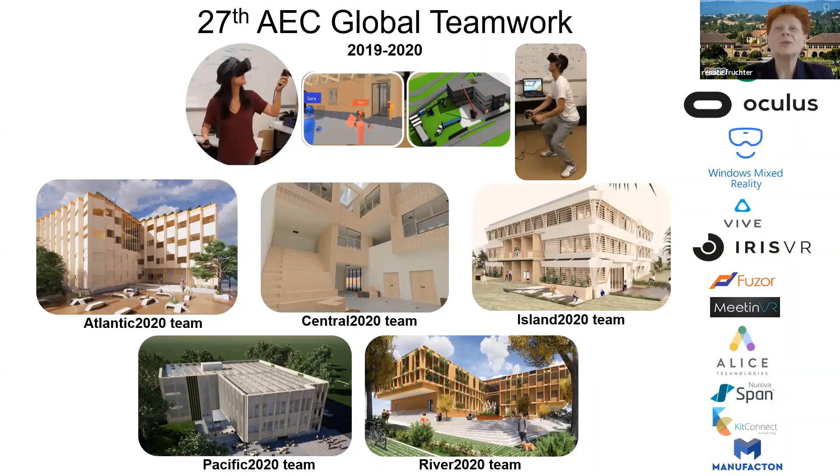We are the Atlantic Team 2020. First, please allow me to introduce our team. We have Maria, our MEP engineer from Copenhagen, Brandon, our structural engineer from Stanford, Ibrahim, myself, one of the construction managers from Madison, Wisconsin, Shuang, the other construction manager from Beijing, and Isabella, our architect, and Lewis, the other structural engineer, both from Brisbane. And here, our beloved owners, Dr. Renate Fruchter, Luke, Adam, Elena, and Andre.

When the team returned to our home countries and began to work on our concepts, we quickly learned the challenges we would be facing in the project. As a global team, we were dealing with 5 different time zones, all while trying to stay connected with each other 24/7. Although a challenge, we were able to identify it as an opportunity as well. Although shared workable hours were limited, they presented us with the opportunity to effectively complete 3 days of work across a 24 hour period. Initially, these time discrepancies made communicating and organizing difficult, but we quickly adapted using effective technology to allow Atlantic team to progress throughout our conceptual design phase.

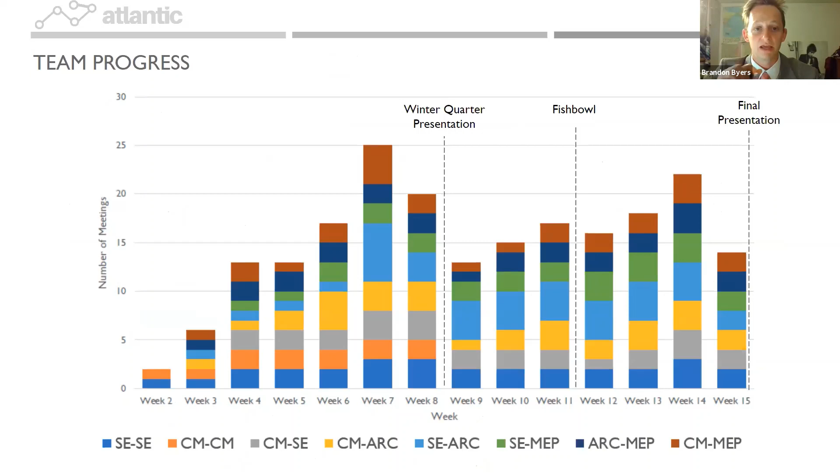Our team's goals stem from who we are as a team and what we want to achieve in the project and what we believe we can achieve for the community through architecture, engineering, and construction. These can be categorized into 3 overarching categories: sustainability, collaboration, and technology, and relate directly to the outcomes we can achieve in this project. We believe in resilience, fostered through community inclusion, compliance with LEED standards, adaptability, and smart design.

We aim for a design and construction outcome that is prefabricated and disassemblable. And working towards these goals, we aim to collaborate, be integrated, and connected to both the occupant and the building.

Our project is located at the fringe of the campus of the University of Wisconsin in Madison, located in the Midwest of the United States. Context is the first factor that starts shaping the identity of our building. The Muir Woods as vegetation, the Memorial Library and Union Square as influencing buildings, and the pedestrian circulation in Lake Mendota were selected as main shaping factors.

Madison has a continental climate with warm and humid summers and dry and cold winters. There are cold temperatures during approximately 9 months of the year. Hence comes the need to create a very well-insulated building, but don't forget about the cooling regarding the hot days in summer. Also, the relative humidity on site is slightly high, and it's a factor to consider in the design.

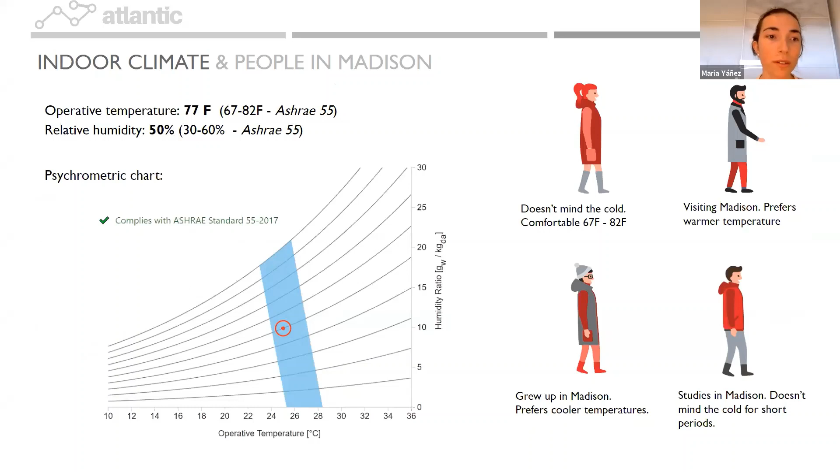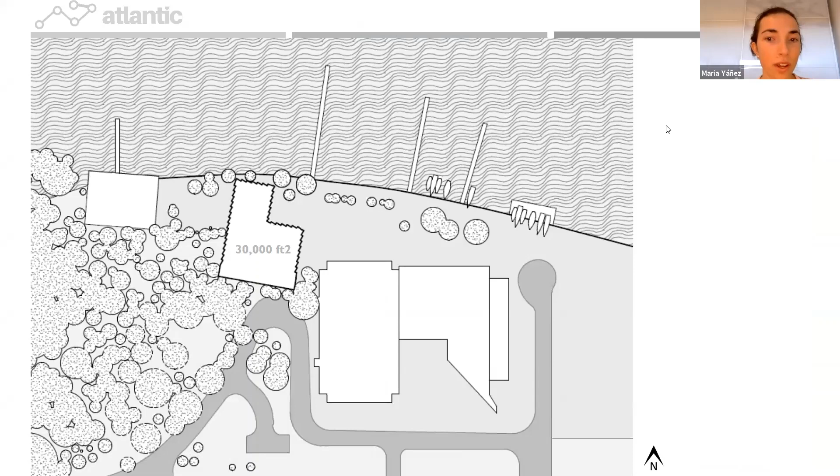The building orientation was selected in order to take the maximum advantage of the local sun, climate, and geography. Our site occupies the intersection between the campus life and the spectacular geographical beauty of Wisconsin and Lake Mendota. While presenting opportunities for its views to the lake and Muir Hill, our site is constrained by its lakefront location, single site entry, as well as a single tight and limited access.

An important aspect of the building orientation is to determine how the sun positioning affects the building design. Our building orientation and architectural design intends to make the most of the outdoor and interior layout while advancing in our key goals. The analysis has been possible thanks to a parametric sun path study through Grasshopper software.

Throughout the program, we developed two driving concepts, both of which underwent much iteration and evolution. The first was forum, and the second was weaving. Both concepts evolved from a singularity to an integrated driving processual idea that generated a spatial quality for the building.

For our concept selection, we wanted to emphasize that the best option should not be chosen simply based on a number. We wanted to evaluate the intangible and tangible aspects of both building concepts. The tangible criteria of our decision matrix integrated our team goals and project challenges. They bring together everything that we're looking for. The intangible criteria are not as readily quantifiable, but are equally as important.

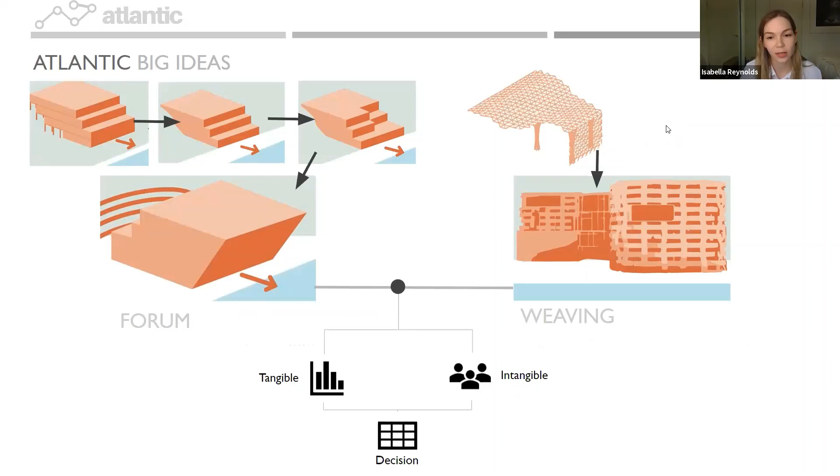After completing the decision matrix, we actually had a tie between forum and weaving. Ultimately, we decided as a team to add one more criterion, challenge. Which concept would challenge us to further encapsulate our team goals? That is to say, which would push us to integrate, to learn, collaborate, and be innovative in our solution. Because of this, we decided to bring forward the weaving concept into the spring quarter.

Weaving is both our team's process and the conceptual driver. It's a singular concept and yet implies the process of combining and integrating. We draw on the local historical practice of weaving, which extends from the basket weaving practice of traditional owners to textile production as a part of the arts and crafts movement. Weaving as a process unifies the threads of sustainability, prefabrication, and discipline knowledge into a building for the future.

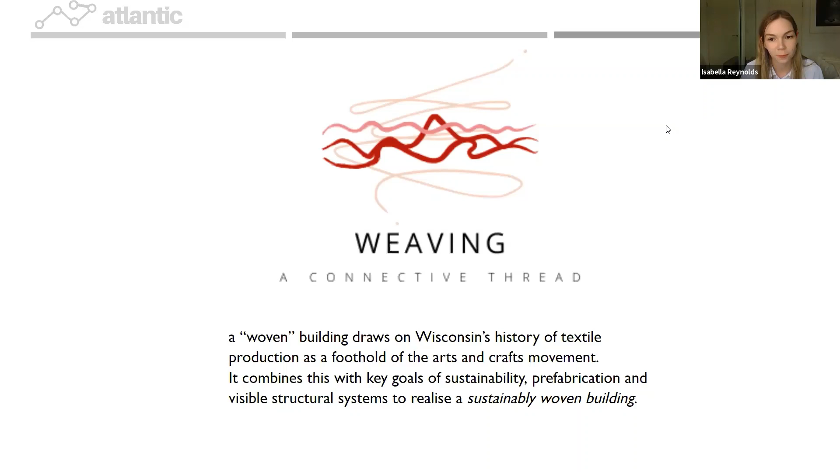As a team, we decided the weaving concept was best conveyed through the facade. Our team's goals and values were reflected in the facade and its iterations, and all disciplines worked together to devise a solution which met these goals and tackled the three challenges. We aimed to produce a facade which was easily assembled and disassembled, contributes to the building structurally, and enhances the building's energy performance.

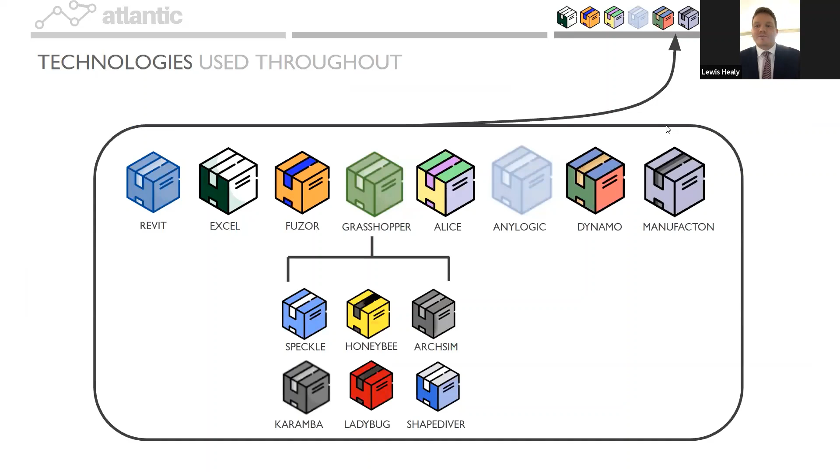Throughout the presentation, we'll be using icons to represent the different software and technology which was used. These also include several plugins for Grasshopper, which assisted in various design and analysis tasks, including Honeybee and Ladybug for solar and daylight, Archsim for energy, Karamba for structural analysis, and Speckle, an open source cloud-based platform for interoperability. These icons will be displayed in the upper right corner of your screen on slides to indicate which software was used.

Grasshopper, a parametric design tool, was used to iterate the facade geometry. This allowed us as a team to rapidly explore the implications of changes of key parameters on the building, and therefore make smarter and more informed decisions at earlier stages of the design process. The chosen control parameters allowed us to generate facade solutions which integrated all of our goals. Revit models were produced using Grasshopper, allowing detailed models to be produced at early stages of the design. This allowed us to present designs to our owners frequently and bring them along the design journey with us.

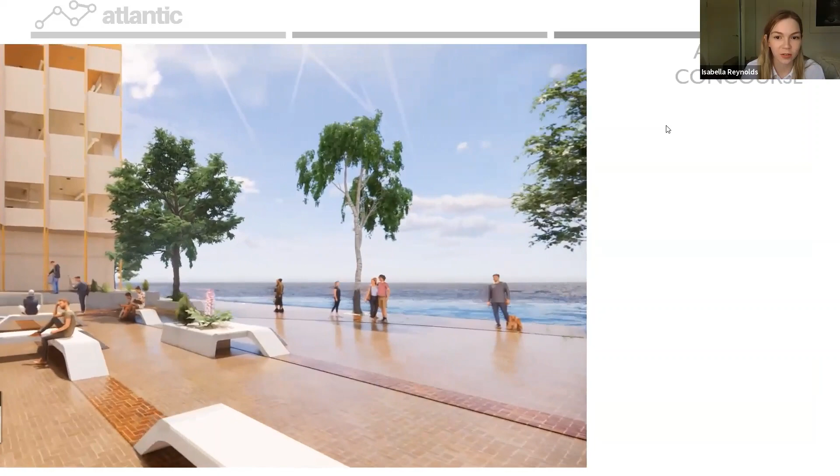The building product synthesizes the challenges of the previous iterations into an offering that interacts with its spectacular geography and creates a space for learning, for teaching, and making for a new generation of engineering professionals. The Lakeside Plaza provides a gathering space and extends into the ground floor lobby, into which the stair, the connective thread of the building, descends. The stair forms the heartbeat of the building, connecting people and physical space. Visual transparency through the building aims to encourage an atmosphere of inclusivity, relaxedness, and openness within the building.

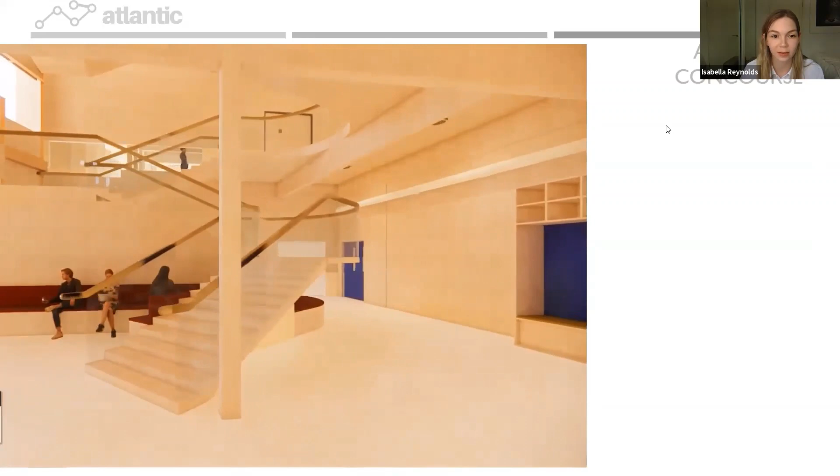The building's architectural expression is evocative of weaving through pattern, texture, and the interplay of light and shadow. It combines innovation with sympathy to its context by mirroring the setback distances of its neighbours and the civic contribution to public lakeside space. It also extends the cutting-edge contemporary architectural language that's evolving within the campus.

The ground floor includes learning spaces such as instructional laboratories, an auditorium, and building amenities, which are centered around a generous public-facing lobby. The mechanical room is placed in the ground floor, and a vertical shaft with the building systems is extended through all floors. By centering the mechanical room within the building, the axis bisects the building, thereby allowing adequate ventilation throughout while minimizing heating and cooling on one side.

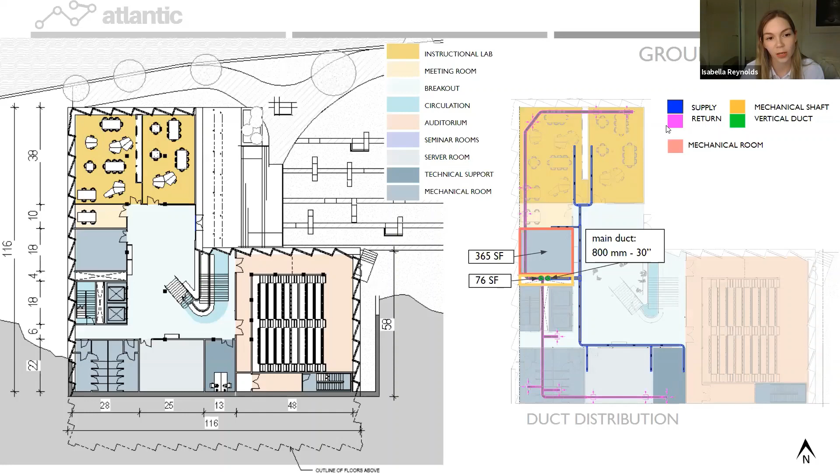Our grid system is a pattern that is concentric to the facade because our floor panels actually sit within the facade system. Our facade will provide uniform support to the CLT slabs along the building's perimeter. The beams in our grid were designed to not frame into the facade due to structural and constructability difficulties. Furthermore, disassembly of the facade would compromise the integrity of the building if the beams were framing into it.

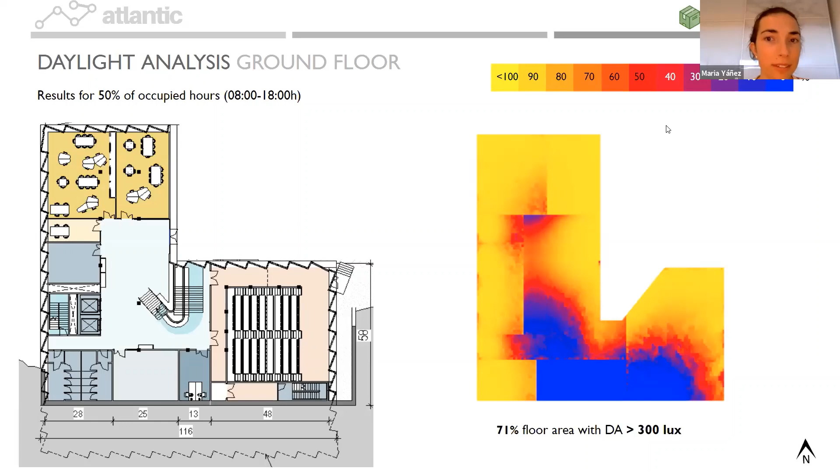A main goal and challenge for the architect and the mechanical engineer was to create an interior design that responded to daylight and energy efficiency. For this, a daylight and energy analysis have been carried out for each floor with Grasshopper. The south windows get good sunlight and allow for extra heating in the cooler months, lowering the heating demand. And the east and the west windows are offset from the sunset and sunrise, which lessens the design cooling load.

Within a workspace on the ground floor, we see how the pattern created through opacity and transparency at the facade translates to a dynamic, warm learning space, fostering a thriving community founded in student engagement and comfort. At the mezzanine level, learning spaces are centered around the connective stair, which connects levels physically and visually. The auditorium on the eastern side of the building is in close proximity to seminar rooms and spaces for learning and gathering.

The sun provides superior natural light for the occupied rooms located in the back, in the first and the second floor. For the ground and mezzanine floors, the spaces that don't require daylight have been allocated in the back, as we have a hill that blocks the daylight.

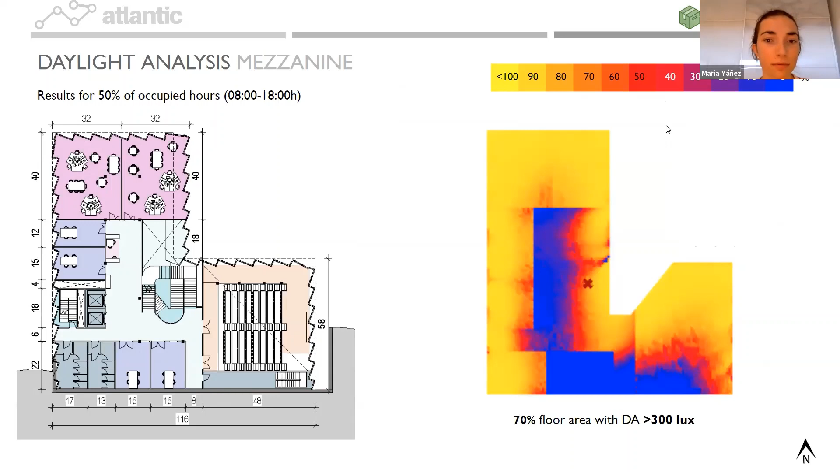The auditorium offers a warm and flexible learning and presentation space with express structure and internal registration of the building form. The retractable seating design allows the space to be used in a multitude of ways and adapts to its owners and its occupants, ensuring resilience as time and needs evolve.

An integrated mechanized track shading system provides complete flexibility, with windows able to be covered by flush timber panels for presentation mode or retracted to provide natural lighting and views to the lake.

At the first floor, faculty offices are gathered around a central open workspace, which allows staff and their students to meet and collaborate informally, the planning fostering connection between building users through functional, delightful spaces.

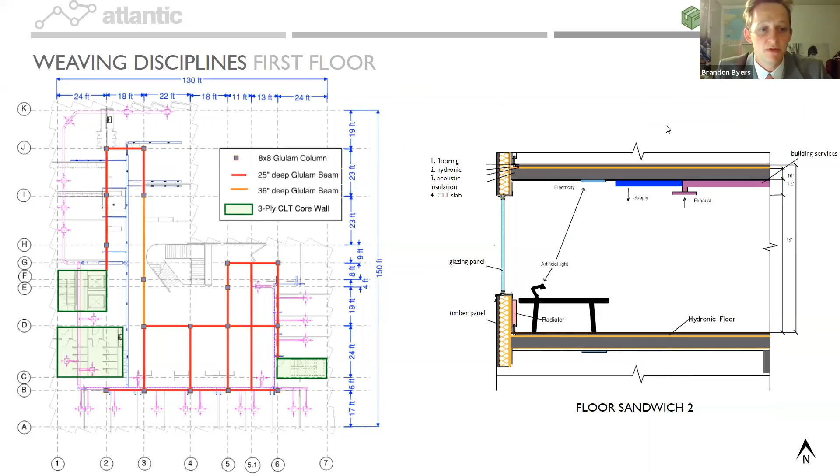You can see that our structure begins to extend on the south side of the building. We use deep beams on the first floor to remove columns near the entrance and open up floor space. You can also see here how the MEP aligns with the grid, weaving within the structure.

The faculty lounge, classrooms, and offices have been allocated in the south, north, and east facade, providing the natural light entry. For the offices and other internal workspaces, the furnishings parallel to the windows have a maximum height of 42 inches to allow the daylight entry.

The faculty lounge, located on the second floor, offers spectacular views to the lake for all staff, rather than visual amenity being restricted to the few. The shape and size of the glazing not only capitalizes on views, but enhances natural lighting and user comfort. A place for gathering, interaction, and reprieve, with integration of contemporary artwork, it makes this place a celebration for its staff.

The weaving concept's extension into planning is exemplified as opportunities for spontaneous interaction and collaboration are maximized, as work pods or nooks within the breakout space weave learning spaces into the public area.

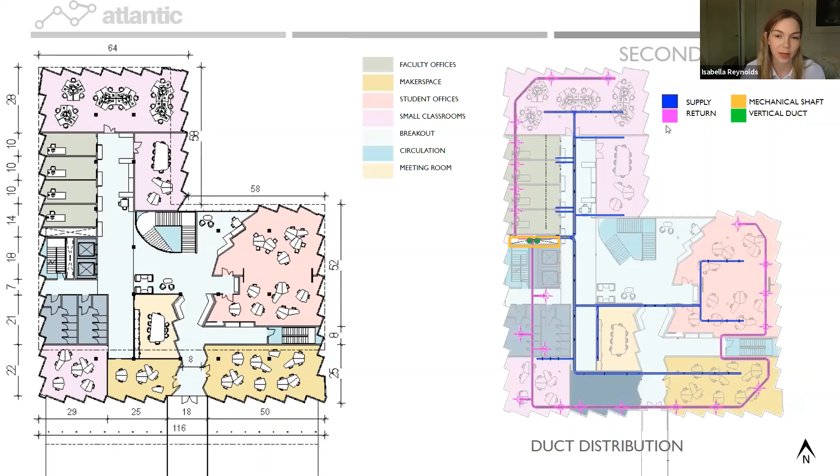Because of our exposed timber system, the mechanical systems were placed beneath the structure to allow for easy integration. With the ventilation system selected, we were able to reduce the equivalent floor-to-floor height, thus improving the user comfort.

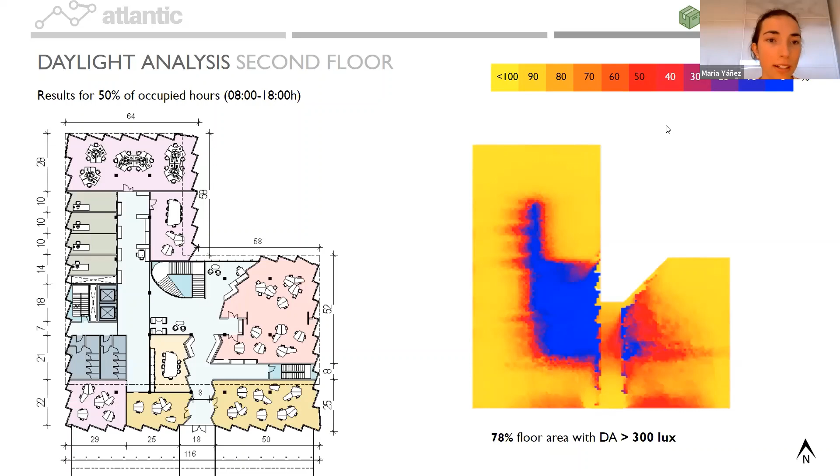For the top floors, shading should be used in the south facade to avoid overheating and user discomfort, so it seemed crucial to use the same software to do a glare and shading study. This one has allowed us to find a shading design that optimizes daylight and ensures glare comfort. Also, by studying the daylight coming into the space, the glazing use of the building has been optimized, and this is reflected in the facade cost, energy performance, and daylight conditions.

The second building entrance at the south carves an activated concourse through the building interior, and it provides views through to the lake at the north upon entering the building from the campus side. The folded exterior expression is continued inside to create an inviting and dramatic procession into the building.

The use of timber within the interior design fosters a connection between the material experience of the building and its construction elements, framed against glimpses of Lake Mendota. Floor and joinery finishes were selected to create a neutral background to the vibrancy of campus life, and light tones reflect light to create comfortable, enjoyable spaces for reading, work, and collaboration.

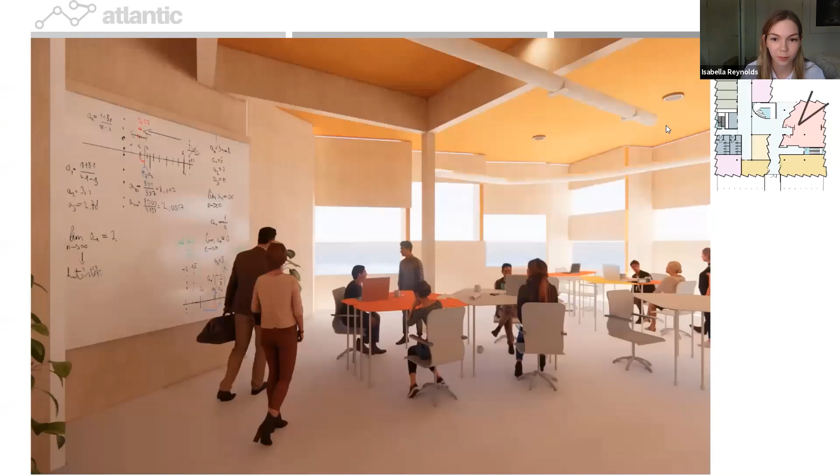Learning spaces also embody the dynamism of the learning experience with warm, neutral materials contrasted with vibrant colour. Building structure and MEP solutions are woven into the daily experience of the student and facilitate an environment where the building itself teaches the students about construction and about design.

Smart control units and sensors aid in the monitoring of the building. Sensors can be found in the lights and HVAC systems, improving the building energy performance. We aim to create a building so smart and intuitive that it knows exactly how much energy is consumed and adapts itself based on the weather, season, and work patterns.

In a meeting room, the weaving concept is extended into the architectural details. A frit pattern applied to the glazing not only provides privacy, but references the building's contextual history through the abstraction of the weaving pattern.

Cutting through the building shows the visual transparency between levels and their spatial connectivity via the stair. We can also see it between forest and lake and the maximization of these two visual resources.

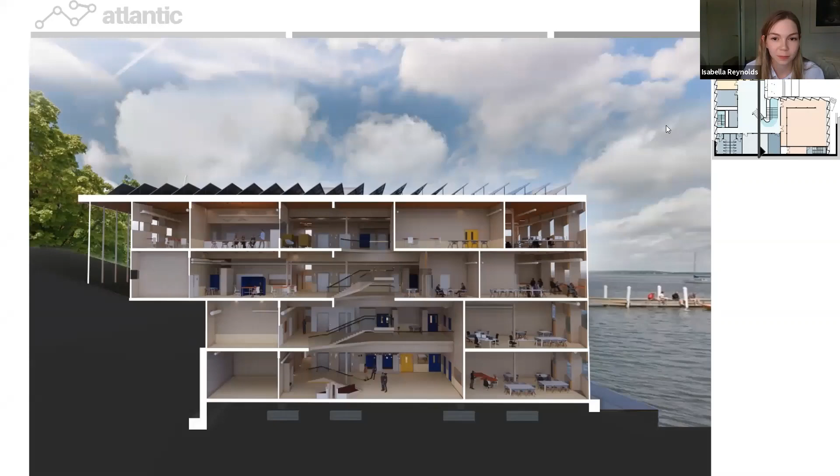The building expresses the notion of weaving through light, shadow, and texture, integrating user needs with disciplined solutions to create a dynamic, iconic building for a new generation of engineers, educators, and administrators of the University of Wisconsin-Madison.

When we began to conceptualize our building, we started by thinking about how our solution could be a reflection of our team's goals and values. All of the constraints listed on the screen contributed to the realization that a prefabricated engineered timber building was the most suitable building solution. This would help reduce on-site activities and construction time, minimize the building's carbon footprint, and aid easy assembly and disassembly.

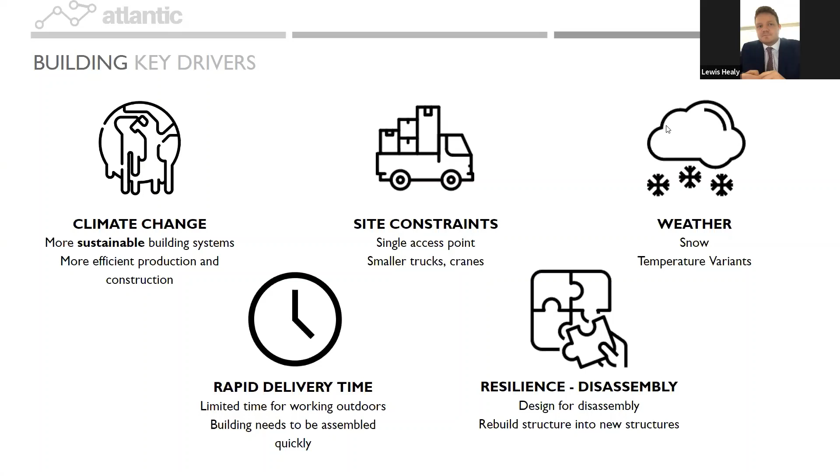The woven pattern was achieved using 3 different module types. 2 different sized timber modules give the facade its noticeable texture. At the same time, the facade was parameterized to make sure it was not too visually complex, and the number of assemblies of modules was at a minimum. Assemblies also consist of glazing panels, which provide the building with adequate daylight. The facade consists of solid timber modules in vertical channels, which provide support to the floors and contribute to the woven pattern.

Timber modules consist of 3 4-inch by 4-inch timber studs wedged between 2 3/4-inch plywood sheets. Structural timber modules are 3 feet long and non-structural modules are 8 feet long. All modules are 2.8 feet high, which allows for 5 modules to be stacked within the floor-to-floor slab height.

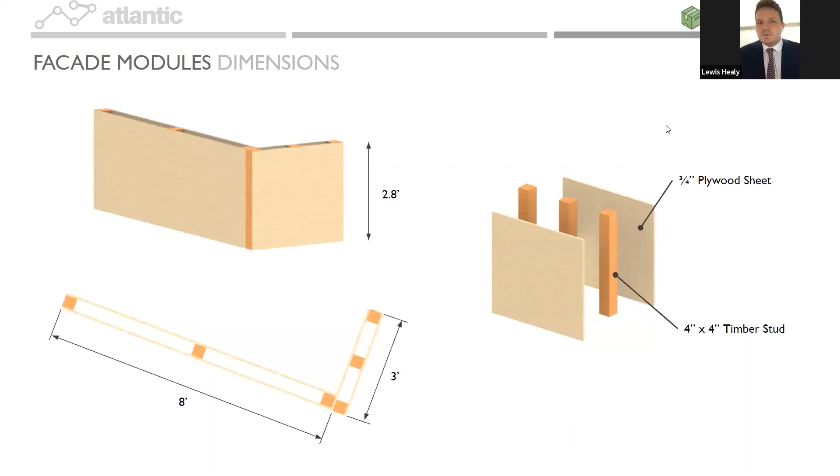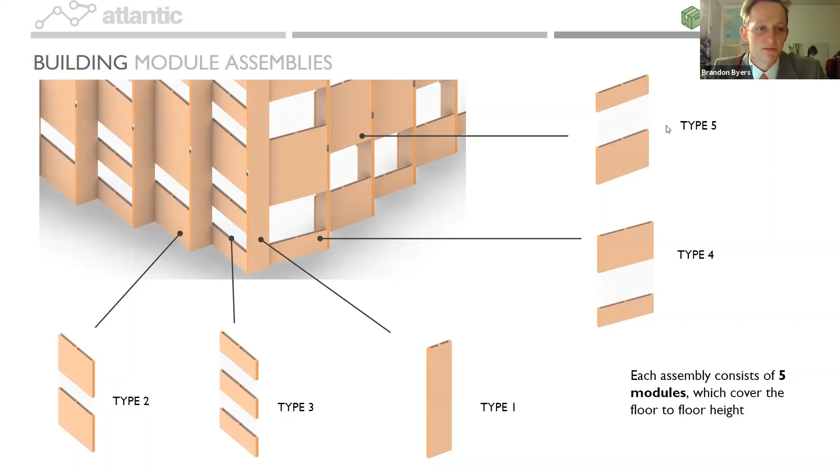The facade will be constructed floor by floor, with modules built into 5 different assembly types. Each floor is 5 modules high, and we need the top and bottom modules to be timber to allow for ease of construction. This meant that the glazing was placed in the middle of the assemblies, affecting the aesthetics of the weaving pattern. But we were able to minimize the number of assembly types by iterating with parametric design.

The Urban Land Institute defines resilience as the ability to prepare and plan for, absorb, recover from, and more successfully adapt to adverse events. The vision for Team Atlantic's design was to allow the building owners to prepare for and adapt to future adverse events. We believe that this can be done by creating a building that adapts as quickly as its occupants.

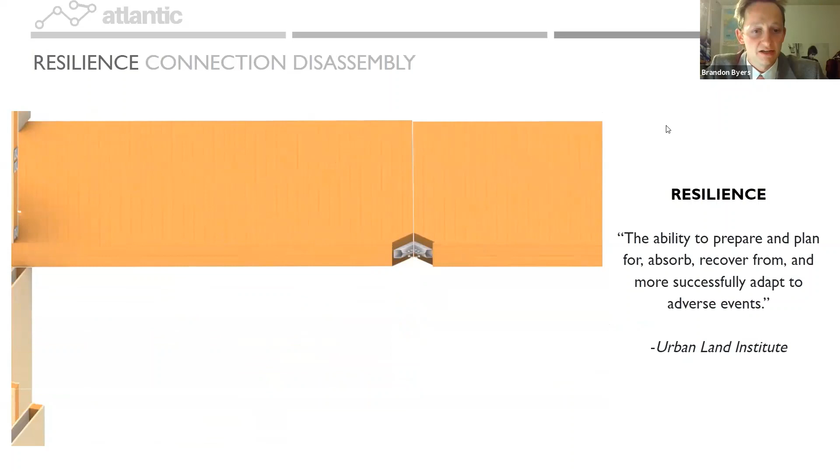If you've ever put together a piece of IKEA furniture, this image may feel familiar to you. In the same way, the Atlantic building is explicitly designed as a kit of parts, which can be disassembled and reassembled. Facade panels, CLT floor panels, beams, and connections can all be reassembled to adapt to the changing requirements of its users and its context. The only way to ensure genuine resilience in a world of constant change is to be truly adaptable.

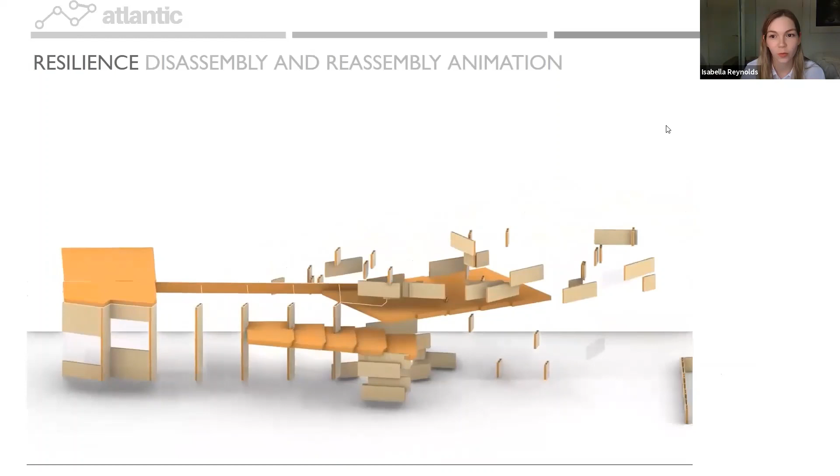Here we can see one of the many potentials for what the building could become should it require a second life. While panel sizes are designed for the uniformity and breadth of building application, the Atlantic building would be perfectly suited to the creation of social housing. This potential use contributes to the resilience not only of this single building, but of the community as a whole.

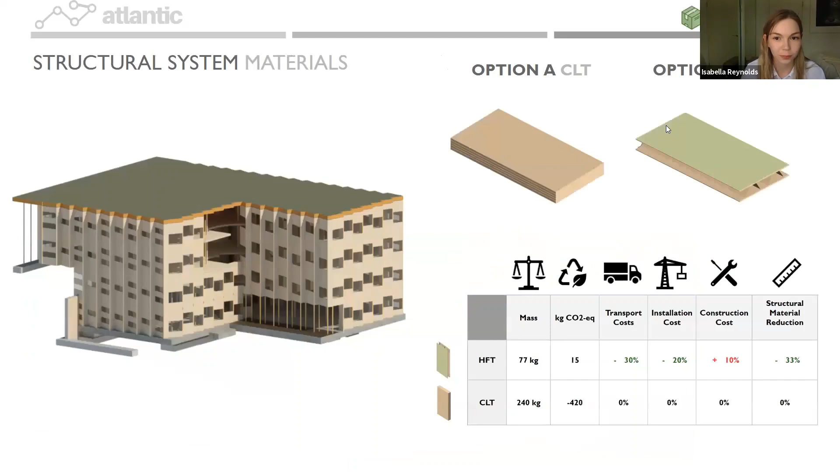Initially, Brandon and I investigated the use of HFT panels as an alternative to CLT floors and walls within the building. HFT is a panelised system using low quality and cheap plywood and veneers reinforced by GFRP. It has equivalent strength characteristics to CLT, but with 66% less mass. After the winter quarter, we decided to use HFT. However, we since realised this would not be feasible to integrate with our facade.

Vertical loads are carried by beams and columns into reinforced concrete pad footings. A shallow foundation system was required due to the high water table at the site, and so 3 feet deep footings founded at 3 feet below ground level were chosen. The base of the facade will connect into an RC strip footing, which protrudes 3 feet above ground. This raises the building above the predicted flood height.

The southern face of the building is supported by a reinforced concrete strip footing on the hill. The region beneath the step onto the hill will be backfilled with soil, which will be resisted by a steel soldier pile retaining wall. The perimeter columns also contribute to the lateral resistance.

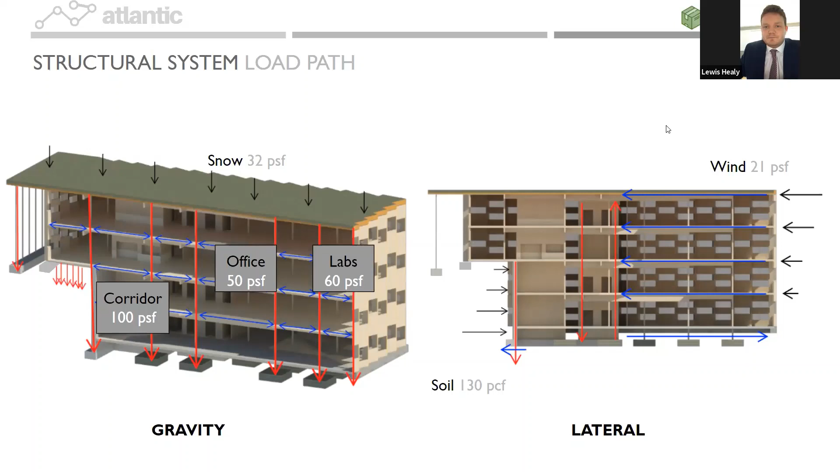A workflow was devised which integrated the structural design and modelling into a single process. The grids were set up manually alongside Isabella within the architecture model, coordinating column placements with the interiors. These grids would be sent from Revit using Speckle and brought into Grasshopper. The Grasshopper script would generate the analysis model from the grids using Karamba, and Rhino Inside was used to create the Revit model using the required member sizes from the analysis.

Keeping the analysis within Grasshopper, we were able to allow the design to be completed alongside the Revit model. Member sizes could be given to other disciplines quickly, especially when space proving with the architect. We could then reduce time spent doing clash detections and re-exporting models. The outputs of this workflow were also thoroughly checked by hand.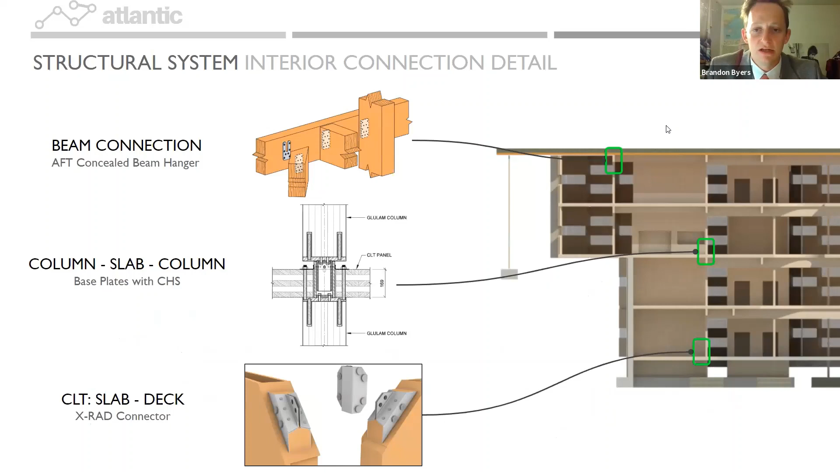Our connection details were designed to allow for ease of initial construction and future disassembly. These timber connections are all hidden to the public eye, but are essential for the construction speed and efficiency. The connection hardware is structural and connects the structural and non-structural modules together. These modules have solid timber that allow for sturdy connection hardware and recessed connections. These connections also allow for easy design for disassembly and load transfer between vertically stacked modules. What is critical for these connections will be the tolerances, but this can be achieved with industrialized construction.

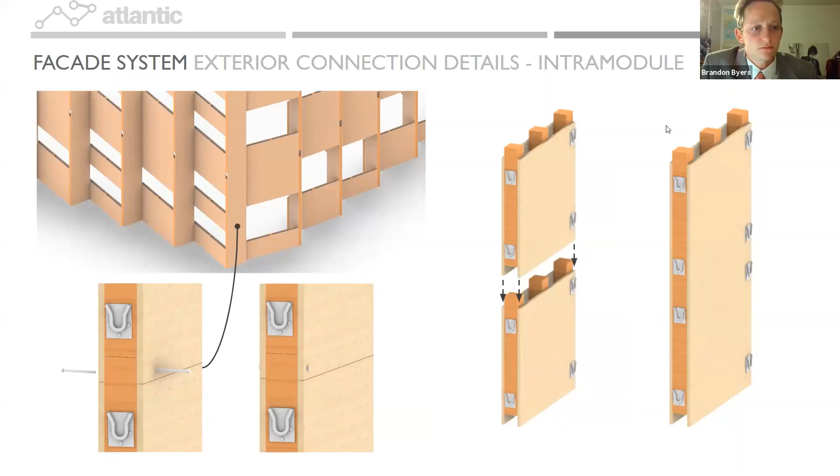Another important feature of the structural facade is the detail connecting to the slab. The connection will account for environmental factors by extending insulation below grade, incorporating a waterproof membrane and sill plate beneath the module, and raising the concrete strip footing above grade to also protect against flooding events. The connection between the timber modules and CLT slab is an adaptation of a standard CLT connection using dowels. The advantage of the dowel connection is the ability to conceal the connection. In addition, the dowel will be inserted into the center stud to not intersect with other hardware.

As we have mentioned, the gravity loads from the slab will be transferred between the internal grid and the facade modules. The narrower structural modules are the stiffer elements and will carry the loads. The non-structural modules will only carry their self-weight. The lateral loading from wind will be transferred into the dowel connections that are approximately 8.5 feet on center.

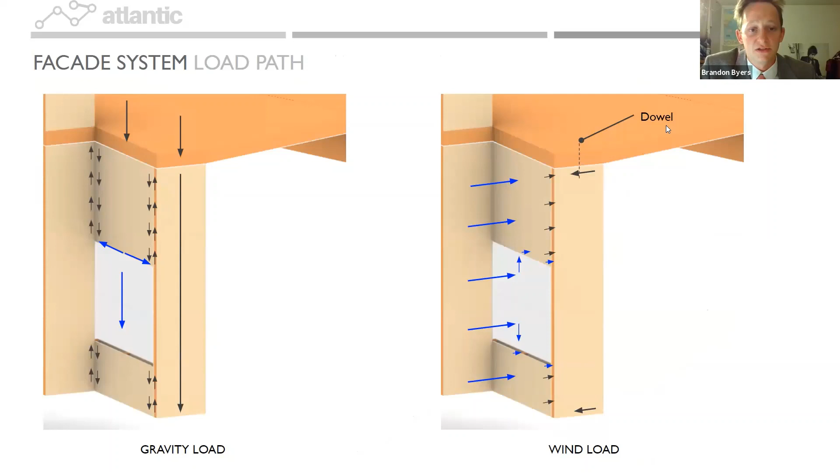One of our primary challenges with the facade was to deal with the effects of weather. The timber is on the inside of the complete built-up module. From there, we devised a system of moisture protection, insulation, and flashing that is enclosed within the timber cladding. The insulation and flashing overlaps from one module to the next to ensure protection from the elements in continuous timber cladding.

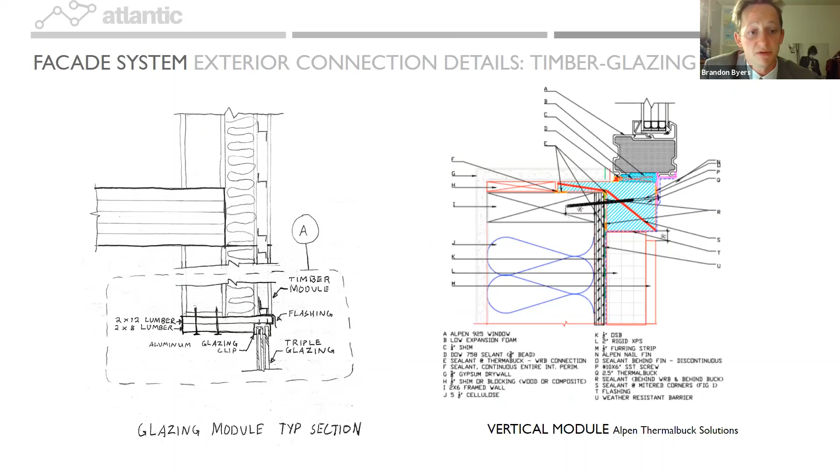Another challenge was designing the glazing modules. We first conceptualized the module connection as a team and then worked with Alpen Thermalbuck to design feasible module connections. The design allows for the timber and glazing modules to separate in disassembly. In addition, we designed the glazing connection on top of the module to allow for displacement, thus effectively acting as a pin connection.

To achieve a high level of energy efficiency, it is important to pay attention to the building envelope assembly. The window plays a very important role in this stage. Our window solution consists of a triple pane that integrates a thin glass into the insulated glass unit, and it is double insulating compared to conventional windows. The insulation of the facade has also been carefully considered, and it is important to create a tight envelope that minimizes energy consumption while being able to manage the heat gains on hot days.

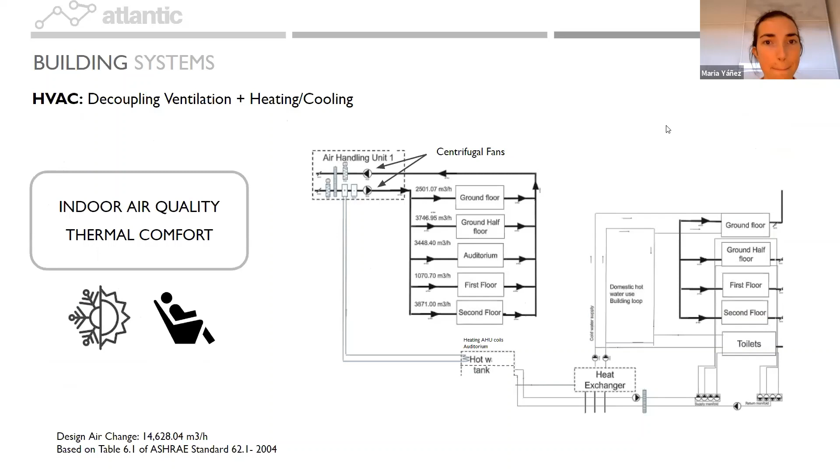For the HVAC, ventilation has been decoupled from the heating and cooling system. This allows downsizing the equipment, reducing costs, energy, and space needs. The indoor air quality is achieved through the fresh air, while thermal comfort is provided by the heating and cooling system. The ventilation is supplied by a dedicated outdoor air unit, which provides 100% outdoor air. Considering our site challenges, the system performance is further improved by using energy recovery, a dehumidifier, and filters, and this comes with improved energy efficiency and user productivity.

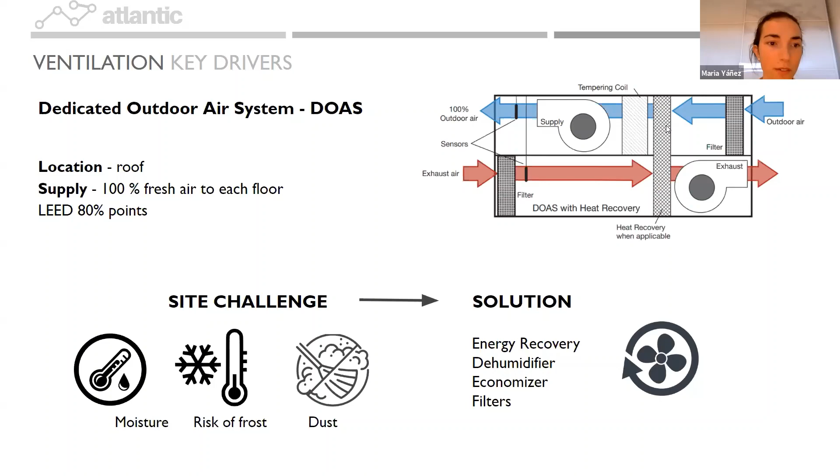The DOAS is capable of monitoring and directly controlling the outdoor airflow and ensures that it doesn't fall below the minimum required. Every space of the building has CO2 sensors to maintain CO2 levels within the respective spaces. With this solution, the indoor environmental quality is ensured.

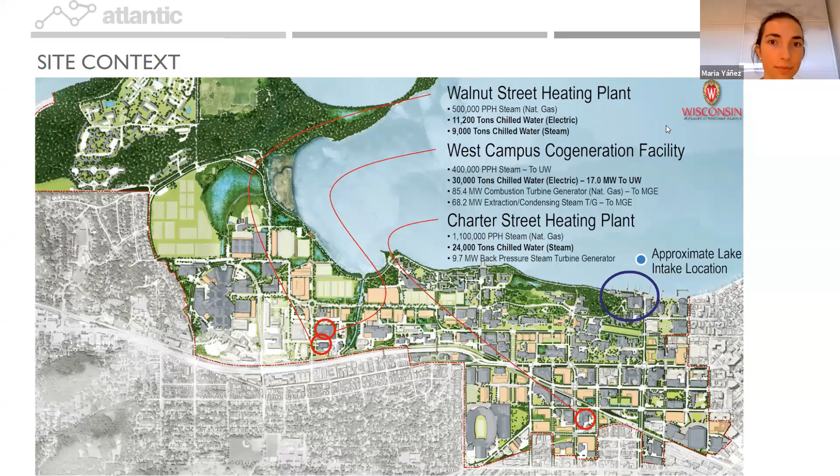So the first step to select the heating and cooling system is to gather the overall context on site. It is important to see what is available and what can benefit the solutions. Our site is surrounded by a lake, and a cogeneration facility supplies the energy source to other buildings on campus. Madison is well known for biofuel production, and around campus many biofuel farms can be found. But does it make sense to use this waste to provide heating for the building? Another solution to manage simultaneous heating and cooling loads was the use of a heat pump, but would it be more economical or efficient?

After detailed research, the West Campus Cogeneration Facility was chosen to provide the energy source. With this solution, another instance of native-to-place design is shown. It is a very economical and energy-efficient solution and follows the owner's requirements and project goals, and the facility also plans to be more sustainable in the future, reducing carbon emissions.

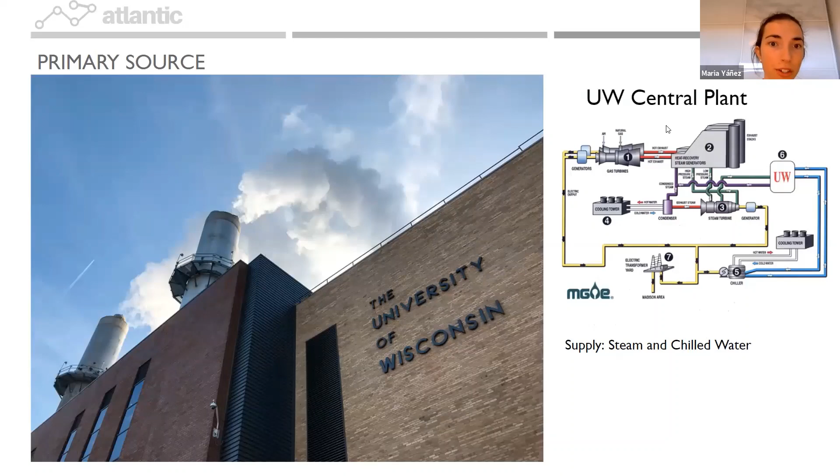The schematic intends to show the energy source management of the building. The cogeneration facility provides steam and chill water for the hydronic systems, and circulation pumps driving the district water are used to ensure the hot water is circulating at all times.

For the secondary system, underfloor heating and cooling is integrated in all floors of the building. Additionally, radiators have been placed in specific spots according to the loads and the possibility of interior design. The chosen strategy intends to satisfy not only the interior of the building, but the building body itself.

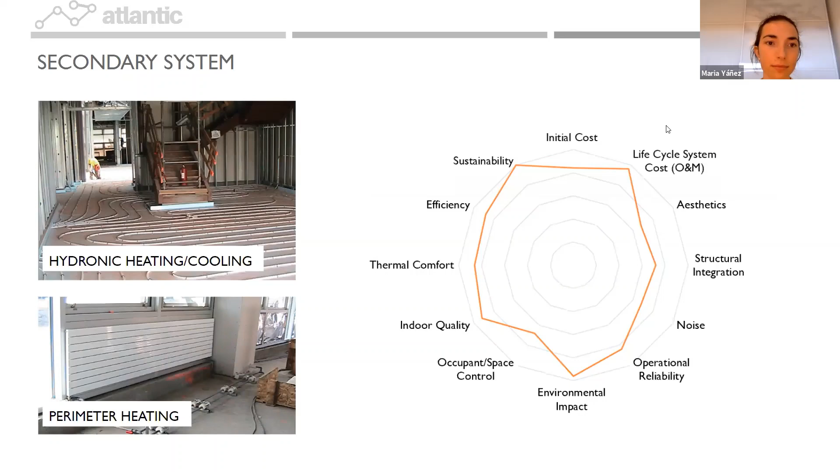According to our goals, to make an intelligent building connected to the user, a zoning system is integrated in every floor. This one learns from the user behavior, adjusting the settings in the long-term view to provide the best comfort.

A first step was to calculate the heating and cooling loads for each space. The Archsim plugin for Grasshopper was used to conduct the energy simulations. The floor plans were sent by Speckle from the architectural Revit model, and the script extracted the zones and ran the simulation.

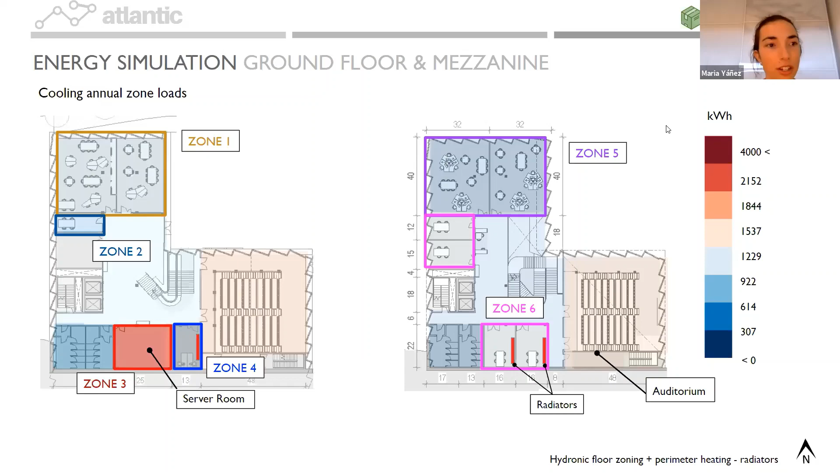To determine the thermal zones, thanks to a collaborative work with the architect, the areas have been grouped together with similar positioning and thermal conditions. The location of the spaces is based on the combination of the daylight and the energy results.

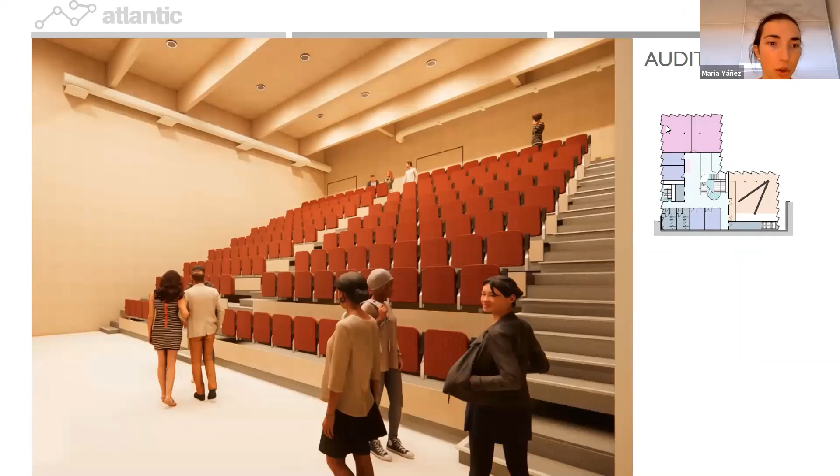The auditorium has been treated as a separate zone, as having high variability in occupancy. Here, the outdoor air is directly ducted to fan coil units. With this choice, the space receives appropriate ventilation levels, as well as being warmed up in a faster way than using hydronic floors. Demand control ventilation also seemed a good choice, and the baseline system has led to decent savings due to the reduced required outdoor air.

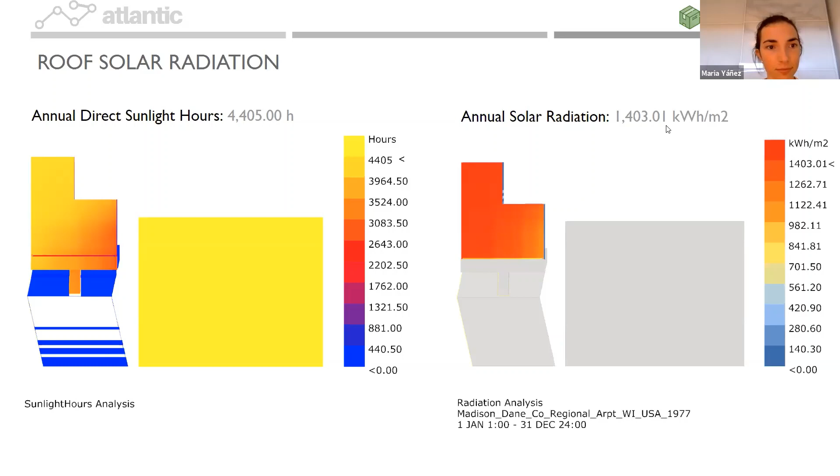Solar energy was considered to reduce the use of energy from the grid and improve our site carbon footprint. To see the building potential, a radiation analysis through Grasshopper was done, and given the results, it seemed the right decision to integrate PV for such a university building. The building harnesses the sun with 224 photovoltaic panels distributed across the building's roof. These are fixed at an angle of 10 degrees, allowing the maximum energy production.

Additionally, to manage the water on site coming from the precipitation, it seems crucial to design a drainage system. So water is collected through a drain channel located in the roof, and this one is redirected through soundproof insulated pipes.

Over the course of the year, PV accounts for almost 50% of the electricity demand. This PV system is always connected to the grid and follows Wisconsin's approach of net metering systems. The generated kilowatt hours are directly offset by the consumed.

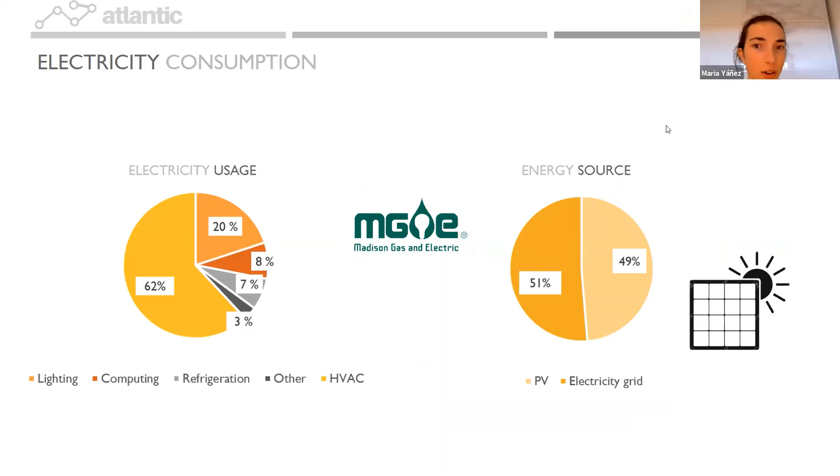To manage and mitigate the water, the urban planning has been carefully studied. Native plants minimize watering requirements and maximize rainwater absorption. In addition, to contribute to the team's sustainability and LEED goal, the building water consumption has been carefully assessed, and by implementing sustainable toilet fixtures, water has been reduced up to 40%.

Lastly, the drainage from the roof is collected and will be reused for toilet flushing. A cistern is placed in the west side of the building, and it is sized to meet 25% of maximal rainwater collected in a year, and this ensures the water is running even if there's a 3-month period with very little rainfall.

Finally, for the sustainable target value, the team has been on track during both winter and spring semester. By choosing a mass timber building, we have further improved the sustainability of our project, and also by implementing energy efficient solutions, we have been successful in achieving a good environmental performance.

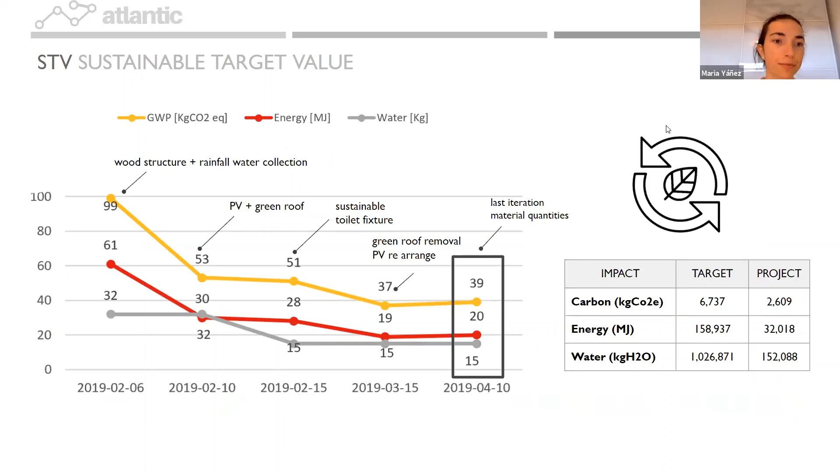Technology has allowed us to deliver an integrated building solution for our owners. By leveraging it appropriately, it has allowed us to create a highly interoperable and streamlined workflow. Part of this also meant assessing the suitability of processes within the workflow and whether or not they will add any value to the project for our owners or make our lives easier. From a technology perspective, intelligence means finding the right combination of processes which will maximize value. Not all processes require technology.

These criteria were used for determining which processes should contribute to our integrated workflow. Using these criteria, we were able to create a workflow which considers intelligence from a variety of angles. Ultimately, meeting these criteria would result in the most efficient and value-driven workflow.

Our solution to the challenge was broken down into 3 stages. The design and modeling stage, tackling discipline workflow integration and modeling production. The manufacturing stage, where technology was used to assess the most suitable approach to construction of our building. And finally, the data visualization and design record stage, where key design data was aggregated and published.

In the design and modeling stage, Grasshopper was selected as the primary tool as it allowed us to explore the impacts of different design decisions all within a single workflow. We have leveraged Speckle to link Grasshopper and other platforms to each other and use this real-time data transfer to drive our models and our processes.

Given our facade model was produced using Grasshopper, other processes were easily integrated within the facade solution. The final output of this stage was an integrated Revit model driven from real analysis results and data. This model then provides the link into the manufacturing construction stage, where technology was used to determine whether or not we should industrialize.

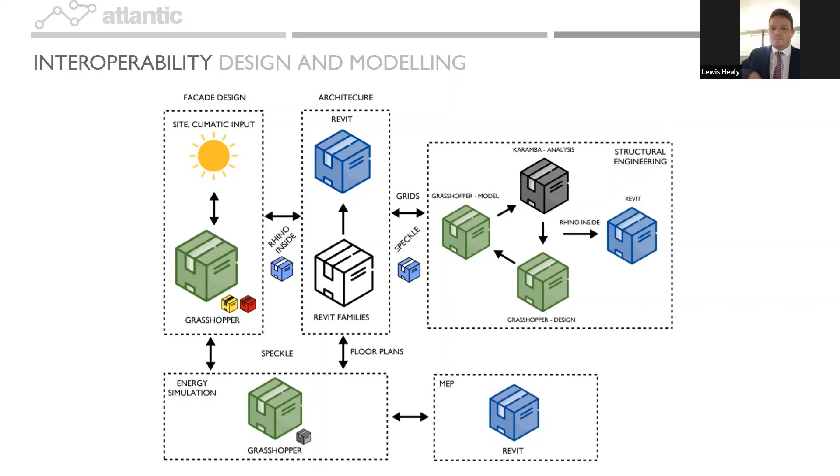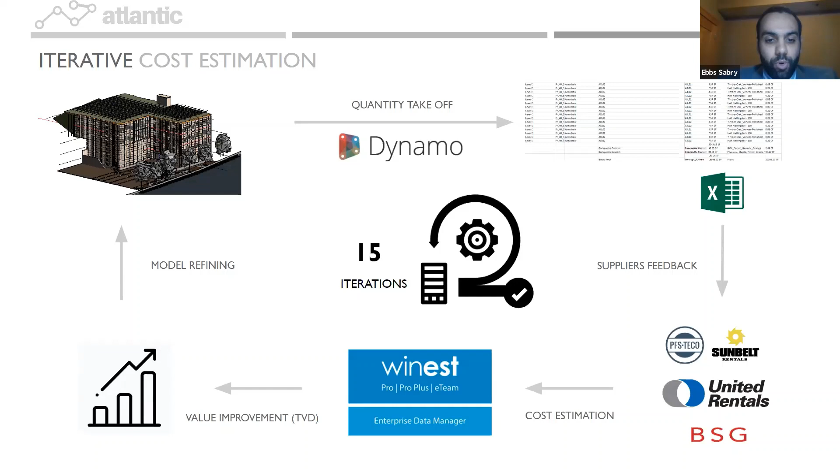A progressive cost estimation approach has been carried out throughout the project. Using DynamoScript, it has been possible to have an automated quantity extraction. With it, an Excel sheet was shared with subcontractors and suppliers to have fast quotes and cost input. The database was then fed into WinEst detailed estimation to investigate the cost breakdown. And finally, the TVD sheet was used to value-driven improvements involving all team disciplines.

Last, interior wood studs were replaced by metal studs because of the high reusability of the latter. Also, it takes less time to install as no pins are used between each stud. The bar chart shows a comparison of our cost against the team targets set early in the process.

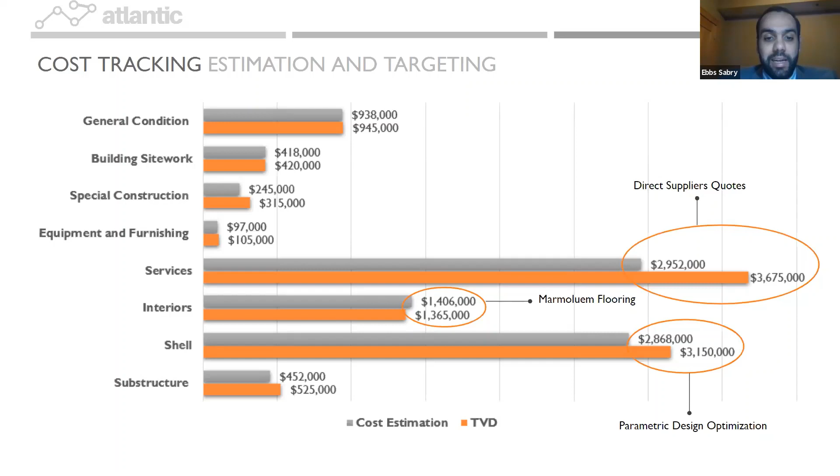In services, direct quotes from suppliers and contractors allowed for reduced and accurate cost estimation. As for interiors, our cost is slightly higher than the target due to using Marmoleum flooring. However, it is considered the only CO2 neutral resilient flooring and the best choice for every sustainable interior. Finally, thanks to parametric design that helped significantly in optimizing glazing density and geometry.

The following shows the equipment that will be used for our project. Accessibility and sustainability factors have been considered when selecting equipment. We investigated two types of cranes, fast erecting tower crane and mobile crane. Mobile cranes have better lifting capacity and can change position easily. However, given our tight site access, they will worsen the traffic congestion if used frequently. On the other hand, fast erecting tower cranes are better suited for constrained areas with high material handling efficiency.

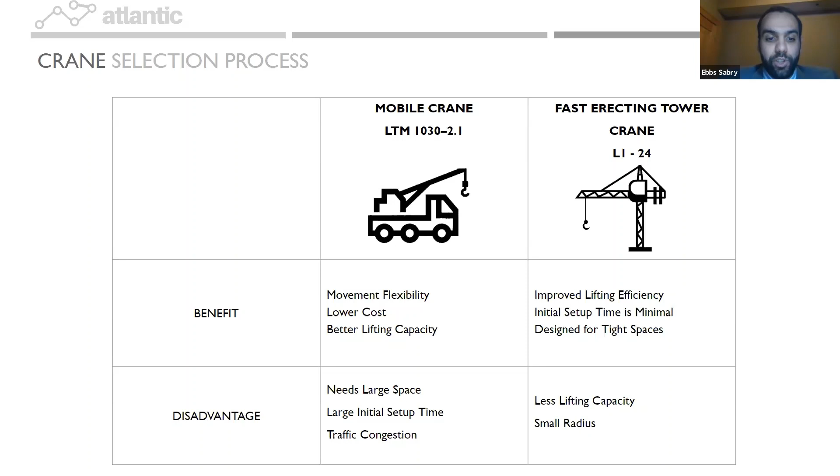We decided to utilize a mobile crane for only one pickup to lift the dedicated outside air system. Also, a fast erecting tower crane will be used to lift the structural and the architectural elements due to its efficiency.

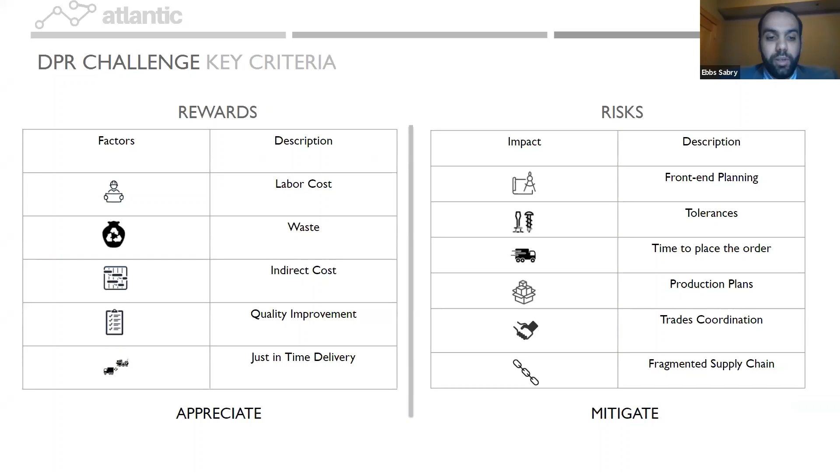The following set of criteria and factors were considered when tackling the DPR challenge. These were divided into risk and rewards. Rewards include reduced labor cost, less waste, less indirect cost, quality improvements, and just-in-time delivery. Among risks are increased front-end planning, tolerances inaccuracies, the right time to place the order, optimized deliveries, multi-disciplinary coordination, and fragmented supply chain.

Since the woven facade is the overarching concept in our project, the Atlantic team developed a selection framework to choose the best option to construct the facade, given the project conditions and the site context. Therefore, the following decision tree starts with investigating whether prefabrication is feasible or not, and if yes, shall we go fully or partially? Under each option, we can produce large or small panels.

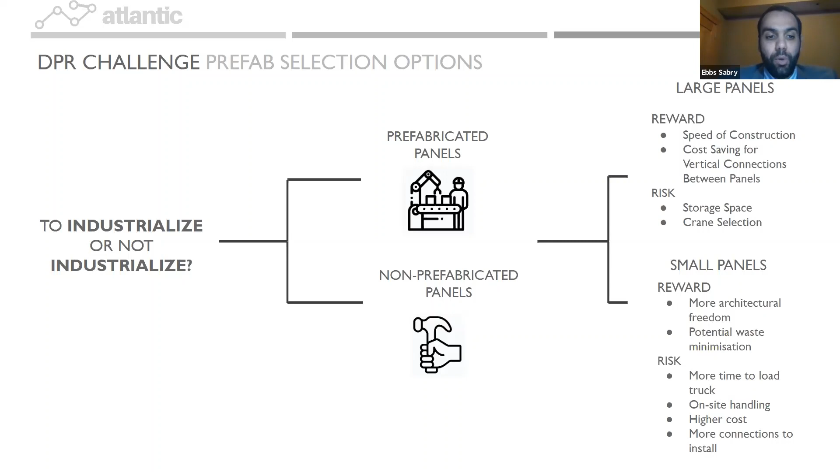Large panels are characterized by higher construction speed, less connection cost. However, they will impact the crane selection and require large store space. On the other hand, smaller panels allow for architectural freedom. However, they will impact transportation and installation efficiency. Thanks to Grasshopper, we managed to accurately quantify glazing and plywood panels per each assembly.

Cost has been calculated using direct quotes from suppliers. Also, time has been calculated multiplying labor productivity rates of each option by the quantities identified. For prefabrication alternatives, an improvement factor has been applied to account for the higher efficiency. This shows that prefabrication of large panels option has the least time and cost.

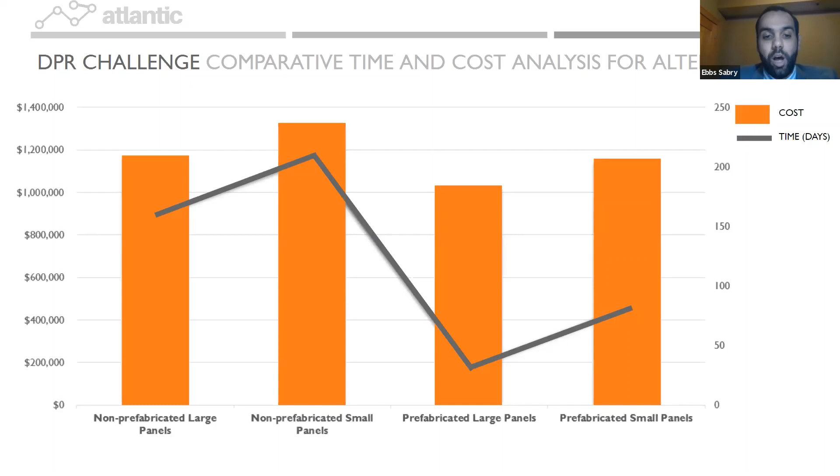Choosing by advantage was used to account for logistical and coordination success factors that would impact the decision process. In general, off-site prefabrication yielded better results. However, there are some risks that shall be mitigated.

In order to enhance Atlantic team cross-disciplinary teamwork and business processes, the following framework was developed to provide real-time integration starting from design and engineering, then manufacturing and construction visualization. This enhanced the overall agility of the team to iterate, measure, and implement design changes and quantify their impacts. The framework consists of the three workflows as follows.

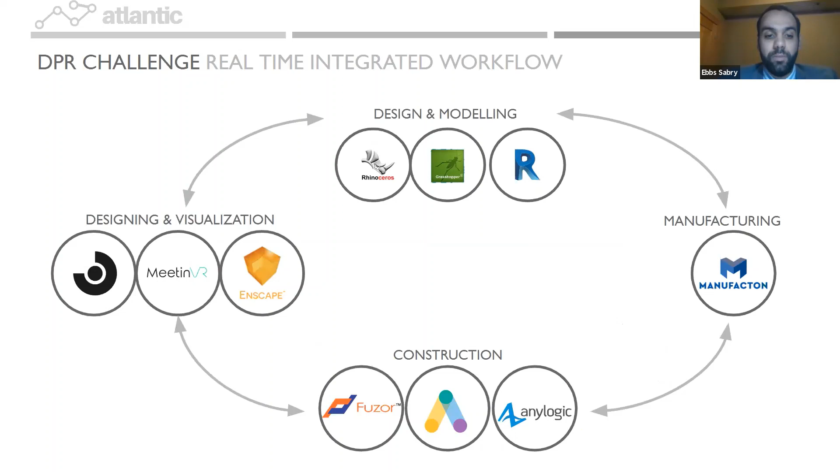The first workflow allows for investigating the design impacts on industrialization in real time. Using Manufacton software, Atlantic team was able to integrate all information needed for prefabrication in one location for more transparent and collaborative work. Also, we were able to view the status of each assembly in our facade in real time. Finally, we could measure how certain design change would impact our bill of materials and prefab orders.

Fragmentation in the supply chain was one of the risks identified earlier. Using Manufacton, Atlantic team was able to track the status of the prefab orders utilizing supply chain viewer. Each status corresponds to a specific color code. Atlantic team also quantified total productivity gains when shifting work to off-site. According to the current analytics, productivity has been enhanced by 30%. In general, a productivity range between 0.6 to 0.8 is desired.

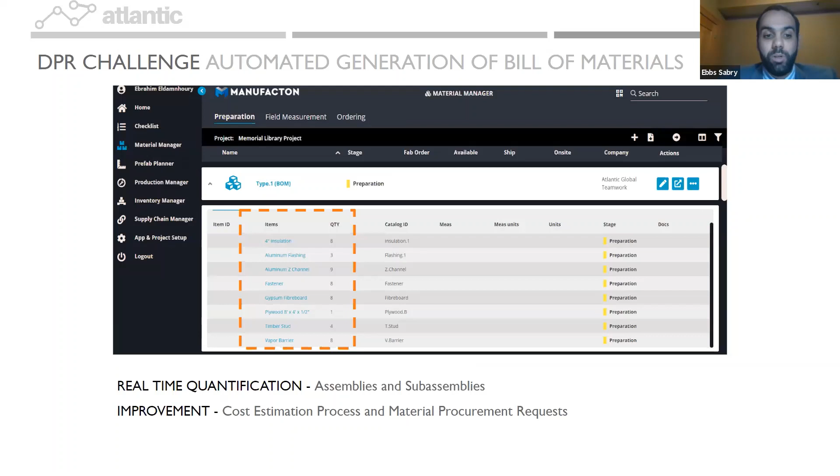Automated generation of bill of materials for prefab orders using Manufacton helped the Atlantic team to first quickly identify sub-assemblies quantities and secondly, to automate the cost estimation process as well. We managed also to track productivity gains for each step in the production line. For example, using Manufacton, we identified the current coordination time lies in the risk area and that more coordination is needed to achieve higher productivity gains.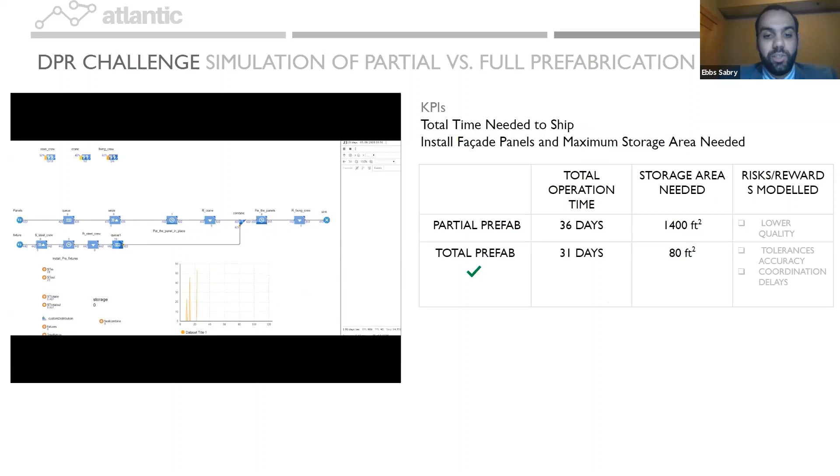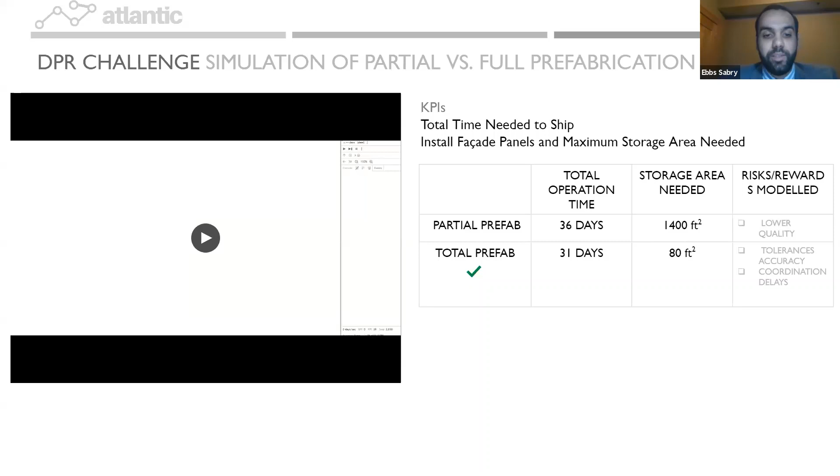Using AnyLogic, two KPIs were investigated. The first KPI is the total time needed for shipping and installing the panels. The second KPI is the pre-assembly area required. Also, we modeled risks associated with both scenarios, such as tolerance accuracies and coordination delays. The video shows the model that has been developed to quantify the two KPIs in both scenarios. In short, total prefab yielded better results in our case, even with the delays embedded within this option.

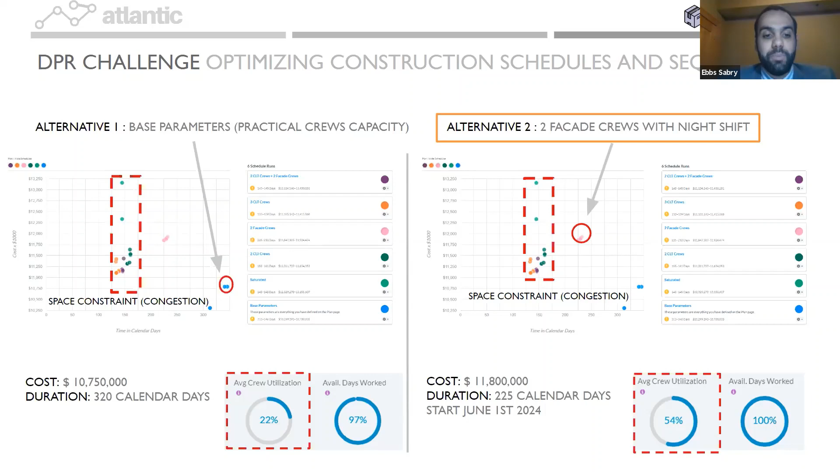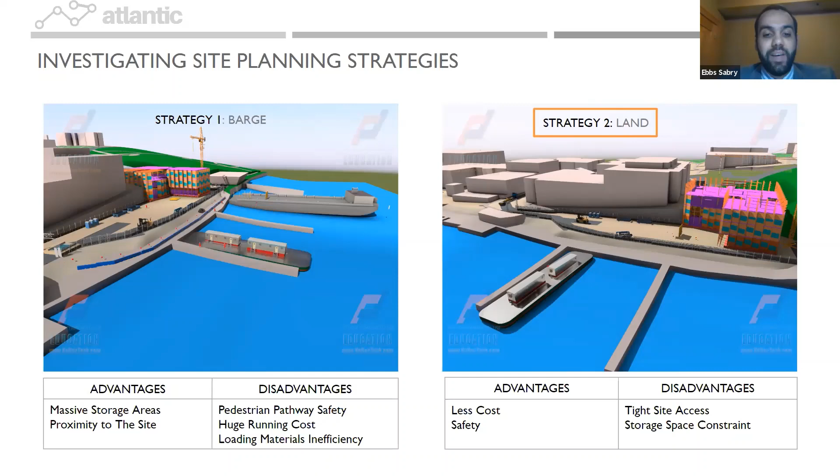The logical following step was to investigate how we will plan out our site logistics. First, we imported ALICE's schedule Excel sheet into Fuzor to build up activities and tasks. Then, we investigated 2 strategies, barge and land. In order to make use of the water body as an asset, we opted to use the barge to store materials and provide massive pre-assembly areas if needed. The Atlantic team investigated also the environmental impact stated by Chapter 30 in the state of Wisconsin. However, pedestrian safety, cost, and material loading were significant drawbacks in this strategy. As such, we pivoted to the land strategy and tried to mitigate the disadvantages associated with it.

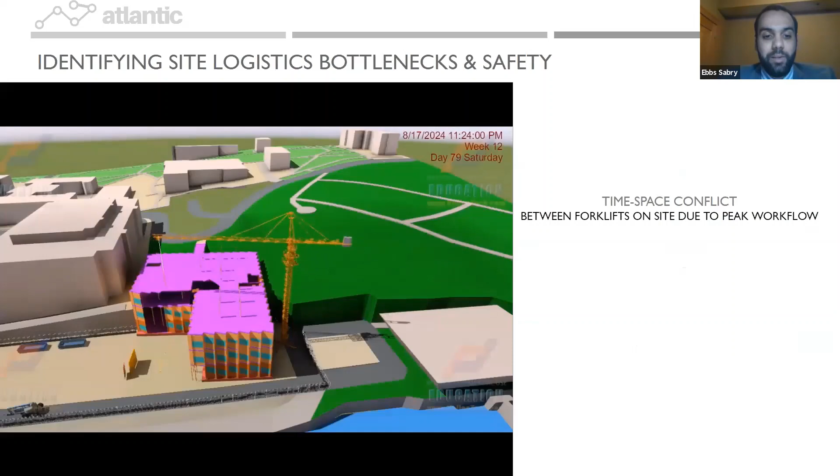Peak workflow day has been identified using ALICE, where we have complex on-site operations and several crews working within proximity in addition to the equipment movement. The following video shows space-time conflict between 2 forklifts. We can notice the crane is lifting columns and CLT panels while a forklift is heading to pick up the facade panels from the truck outside. Simultaneously, another forklift will appear now and it picks up interior walls and will be in the path of the first forklift.

In order to overcome this problem, we investigated shifting the trailers to float over the lake. This will help provide more free spaces for equipment to move and also increase workers' morale and motivation. However, we had to make sure that this solution is feasible first. According to ALICE, our project will be mostly executed during the summertime. Therefore, there is no weather issue.

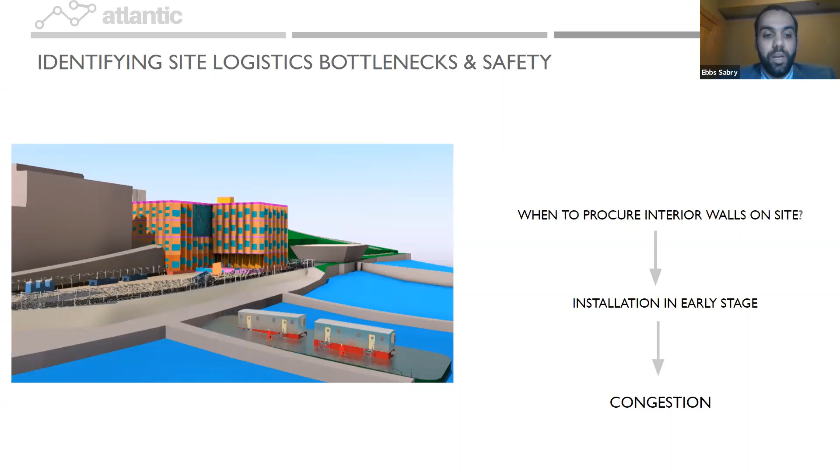Also, one interesting insight that we managed to figure out through Alice, through Fuzor, was how we're going to actually install interior walls if our facade is structural. We investigated if we can ship the interior walls early in the project. However, simulating this in Fuzor showed that there will be congestion and will limit space for other trades. As such, we decided to leave 2 vertical openings at our facade to allow for interior walls entry after consulting with the structural engineers.

This will actually help reduce congestion and heavy equipment movement on site. Also, it will help with just-in-time delivery and reduce quality risks. The video actually shows the sequence and the time when we have the 2 vertical openings enclosed.

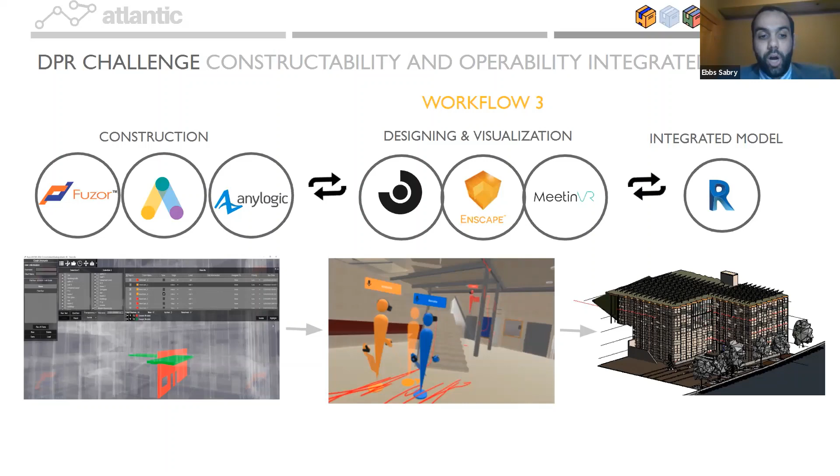The third and the last workflow is to investigate how constructability, safety, and logistic issues can be mitigated early in the design process. Clash detection analysis has been run. Then VR software like Prospect was used to visualize the issues. After changes are discussed on the team level, they are augmented with the integrated Revit model.

Following integrated project delivery principles, Atlantic team developed an Excel tool to assess risk and rewards associated with design decisions and prefab options. The process starts with a detailed description of the change. Disciplines affected by the change then meet to discuss the cross-disciplinary impact. Summary is then reported during the team weekly meeting to propose alternative ideas, quantify the impact, and finally approve or reject. To promote transparency and trust among team members, the tool has been integrated in the IT challenge solution.

Strategically, our framework builds a highly collaborative, agile, and innovative team. The process is concurrent across all disciplines and openly shared. Risk is managed collectively and equally. Communication is virtual and relies heavily on only one single source of truth. Finally, we build solid ties of trust and cooperation not only among us, but also with our clients.

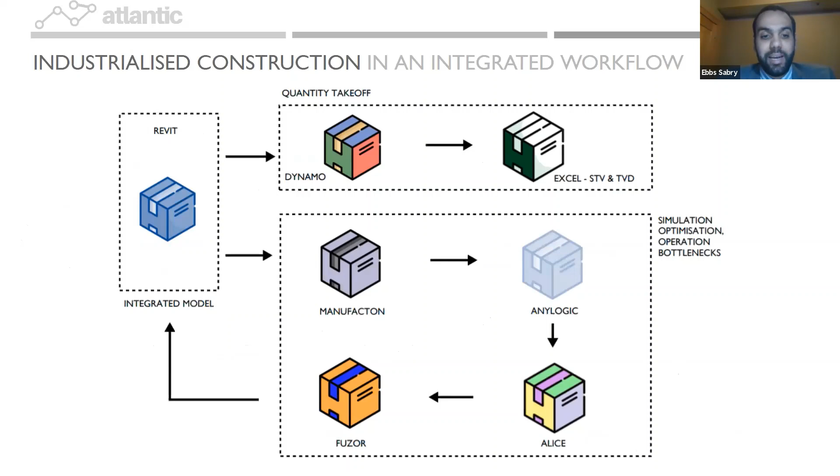The three previous workflows have been integrated with the rest of the IT framework to link engineering and design upstream with manufacturing and construction downstream. This end-to-end integrated workflow has been crucial for us to produce detailed facade iterations developed off of analysis and real data. Given the majority of this workflow has been completed using Grasshopper and Speckle, key design information which contributes to the design iterations can be extracted from the streams or the scripts into a single location.

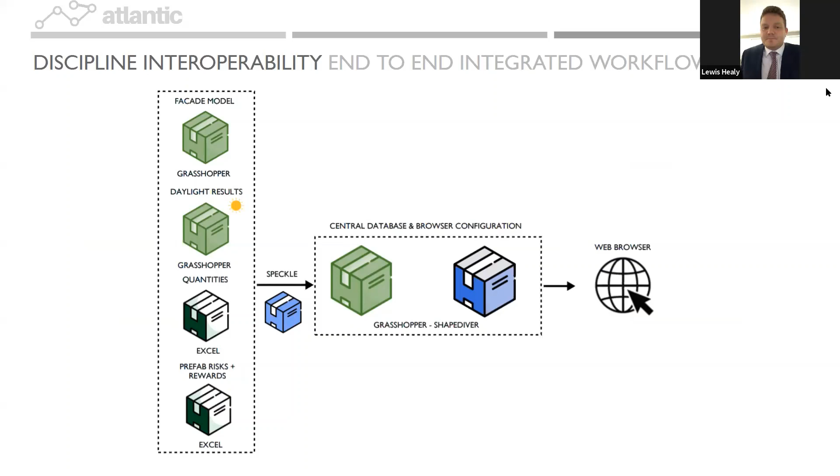This information was stored in Excel or Grasshopper and then sent using a single Speckle stream to a central Grasshopper script, which aggregates all of the information. From here, the ShapeDiver plugin was used to generate a web application which hosts this information, as well as all of our design iterations. This allowed us to bring our owners along the design journey with us, as well as track a history of why key design decisions were made. The interactive browser allows the user to visualize all design iterations and the associated data contributing to the design changes.

In summary, our answer to resilience has been multifaceted and based not only on resilience for a single building, but resilience for the community as needs and context change. At the building level, it's included water-sensitive design, reuse and reduction, adaptable and flexible spaces such as the auditorium, and a building solution intricately and expressly designed for disassembly and reassembly.

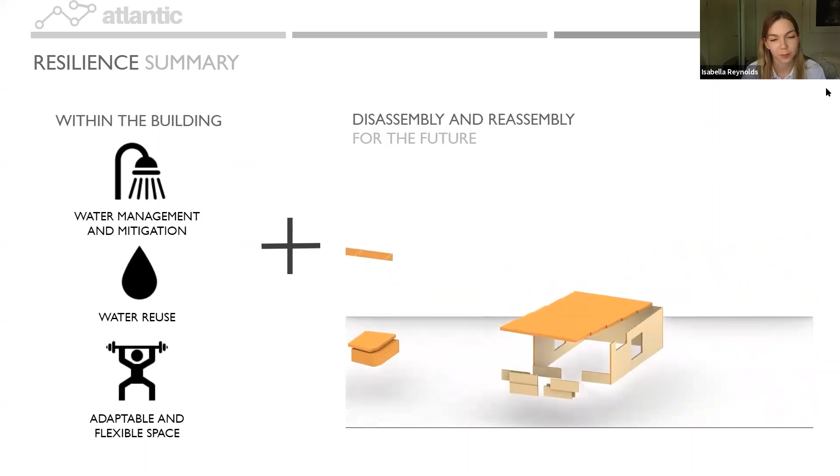Returning back to our project goals, our goals stem from who we are as a team, what we want to achieve in the project, and what we believe that we can achieve for the community through architecture, engineering, and construction. They were distributed into three main categories: sustainability, collaboration, and technology, and were integral in guiding our team's process. We were able to achieve our goals through our unique solutions to each of the challenges. Through focusing on discipline and platform interoperability, resiliency, industrialized construction, and risk and reward thinking, we inherently grew stronger as a team.

Our team learned a lot and had a lot to say over the past several months. This project was a massive and challenging endeavor. So much international and industry collaboration was essential to the accumulation of knowledge and experience on this project. We appreciate every phone call and every email we've exchanged with all of you volunteer mentors. Most importantly, we recognize and appreciate the unyielding time and effort Dr. Renate Fruchter has put into this coursework and team experience for us all.

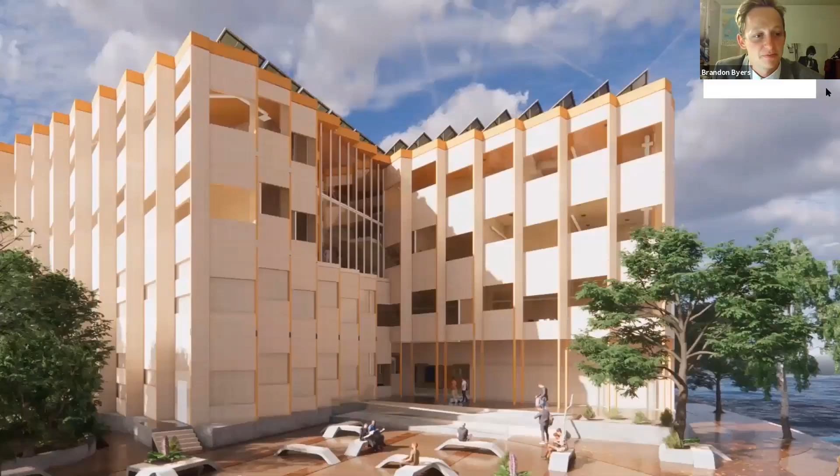Finally, the people of the Atlantic team are proud to present the final product of our hardworking and rewarding processes. Plus, we invite you all to join us and experience the building application for yourself and get a better insight into how our facade became what it is today. Thank you on behalf of the Atlantic team.

Well done. Thank you very much, Atlantic team. Inspiring exploration and joint decision making. Thank you, and we look forward to the questions from the mentors and the fruitful dialogue May 8, 2020.